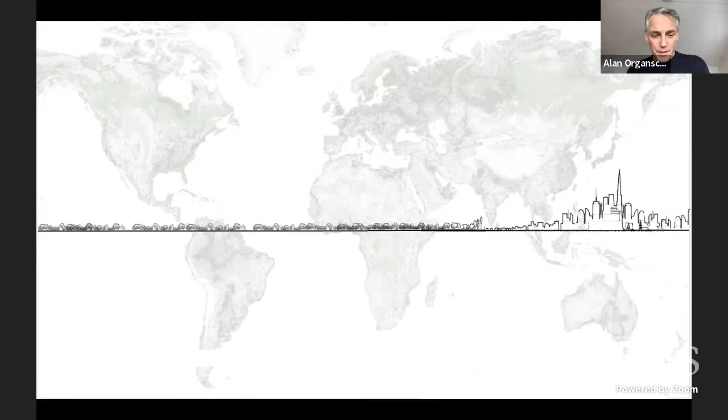And so really these two landscapes have been at war, or I should say one landscape, the city, has been a kind of predator of the other landscape, which is the forest. And if we look at the history of these buildings and we start to understand what it takes to build buildings of massive scale, we essentially have dug, literally and figuratively, ourselves into a giant hole.

And then if you also start to look at that giant massive pile of material that is represented by most global cities, we see that we have just surpassed the point where anthropogenic mass, in other words, buildings, the stuff that we industrially produce, now outweighs all the biomass on Earth.

And the first place we can deal with it is in our own work and right at the beginning of the building life cycle. And this is a thing that I really feel pretty strongly about, and that is that architects and engineers and builders have enormous agency as consumers of enormous amounts of material through the buildings we specify to act against these changing climate conditions.

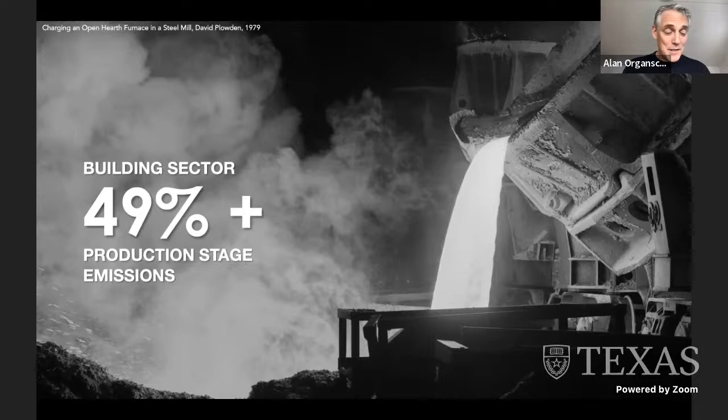And remember that first year is where we dump a lot of emissions into the air, and we create a lot of waste too, solid waste that's covering the Earth. So this is a little bit of a paradigm shift from the way we think about sustainability.

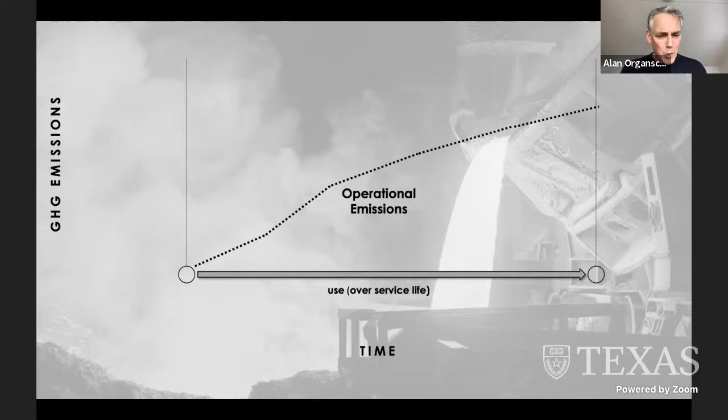We used to think about sustainability primarily as operational emission efficiency or operational efficiency, reducing energy consumption, building really fat, super insulated, super tight walls with lots of really good insulation materials that are made of fiberglass and foam, plastics, and things like that. And that was all very well and good, except what we found really over now several decades of pushing sustainability efforts, that we haven't solved anything.

And largely that's because in the building sector, what happens is we create this carbon spike, as I mentioned, at the building life cycle, and then our emissions are relatively flat if we have super efficient buildings or net zero buildings, relatively flat during the operational lifespan of the building. And occasionally we have some renovations and repairs, and that pushes a little more carbon dioxide and its equivalents into the atmosphere. Then it flattens again.

And at the end of the building life, we tear the building down, and mostly we landfill it. Sometimes we burn it for energy, parts of it. And that creates another spike. And so what you see is that we never, no matter how efficient we are in our building operations and how much insulation we pack in and how much renewable energy we use, we're always throwing more material and consuming more raw material to make our buildings operate better.

So we looked at this idea of comparative emissions around primary structural materials. And what we found was that concrete, timber, and steel have very different carbon footprints, of course, as you might guess, or you well know.

The problem is that when materials are typically compared, the metric is unit weight per carbon emissions. So that means a piece of concrete and a piece of wood by tonnage emit pretty close to the same amount, as you can see in that bar graph.

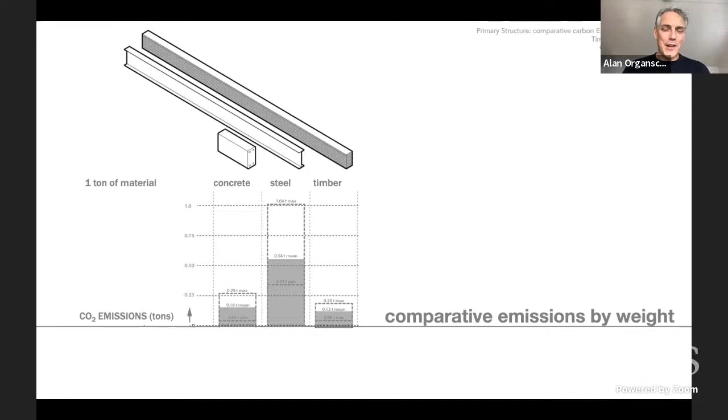If you take into account the massive increase in strength-to-weight ratio of a material like timber, you start to see that comparing emissions by weight alone is a ridiculous metric.

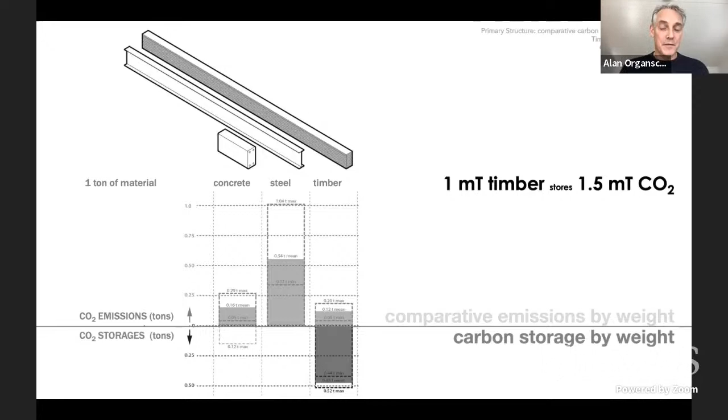And then if you add the capacity of these materials to actually store carbon, because biologically timber is half carbon, you start to see the real benefits of using plant-based materials. These are significant if you think about that big carbon spike we're talking about.

It is very ironic to me that a relatively low-intensive method of removing material and processing it produces perhaps the most destructive morphology we know in terms of building and urban human settlement, which is suburbia, with huge infrastructural costs, constantly updating roadways and transmission lines, and producing enormous vehicular traffic and associated emissions.

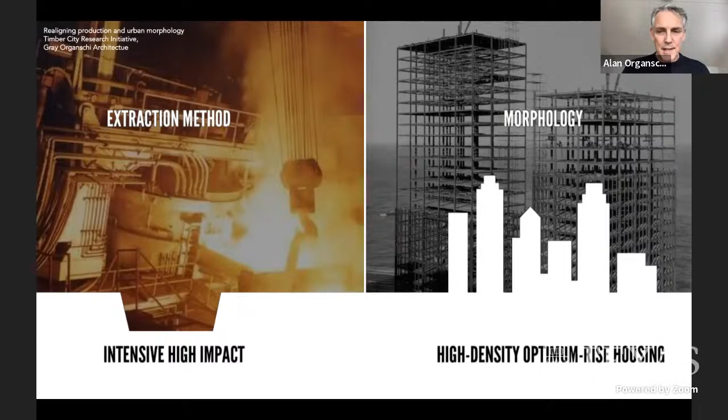Meanwhile, these really intensive, high-impact material classes, steel and concrete, which use enormous amounts of energy even when efficient, produce actually quite efficient building morphology—dense, high-rise or mid-rise building.

So the question is, how do you break the relationship that exists between dense urban building, which really should be our future given the population growth and land area available to us, and these more extractive mineral-based economies?

And then that same relationship that seems fundamental to the way we think of building, which is that timber is used for these very low structurally requiring morphologies, suburbia. We think we address it by really pulling in our skirts a little bit and looking very carefully at the way regeneratively or sustainably managed forests and other agricultural waste systems work.

Et cetera, can be moved through this new material processing that we're going to talk a bit more about today into the city.

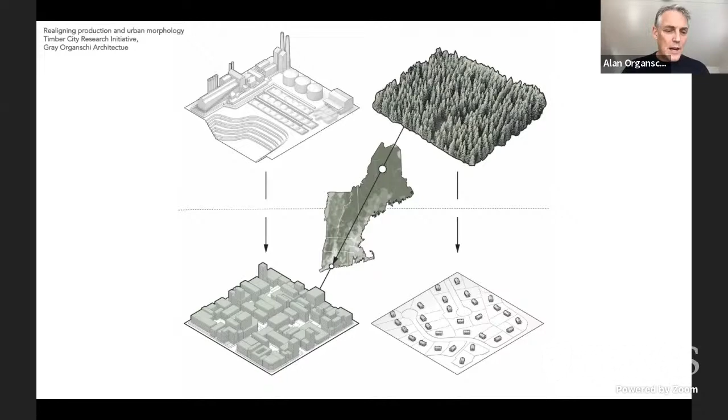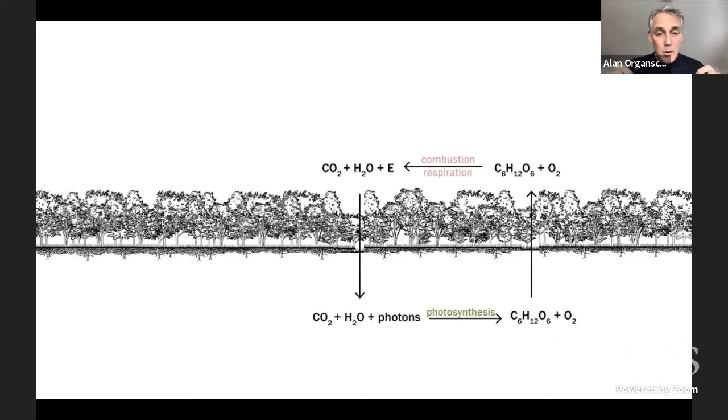What's really important to remember about using biological materials renewably is that the carbon cycle relies not only on forests, but also on the woody matter and soils that exist below in the upper layers of the lithosphere, where 50% of the carbon in our forest biome exists in the soils.

So you can literally cut down some trees, if you do it carefully, with potentially really good benefits, and still protect huge masses of carbon. And as the forest regrows, you get huge benefits.

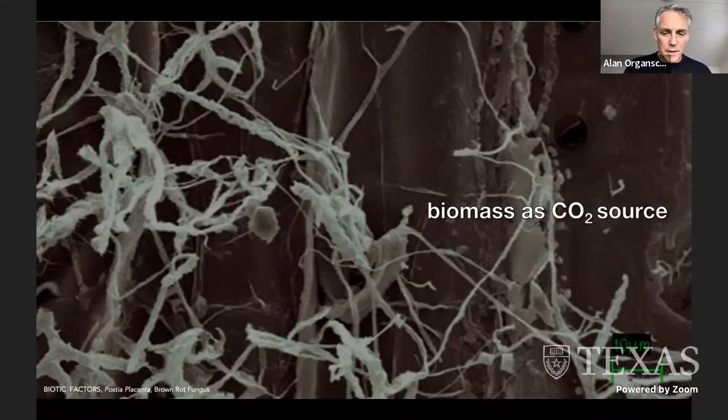So we should talk quickly about the challenges we face in thinking about using all this biological material for building cities. Biomass is, as you know, a CO2 source. As it rots because of a particular fungus, like brown rot fungus, it emits carbon on the forest floor.

Currently, domestic heating and cooking is fueled mostly in the world by wood, the burning of wood.

But there are other forces of forest conversion. Beef grazing land—land formerly rainforest converted to beef grazing land, say in Latin America, South America—is one source of forest conversion, as are agricultural conversions, like this oil palm plantation in Borneo, and tar sands oil extraction in Alberta, Canada. And, of course, suburbanization itself is consuming forest and creating emissions.

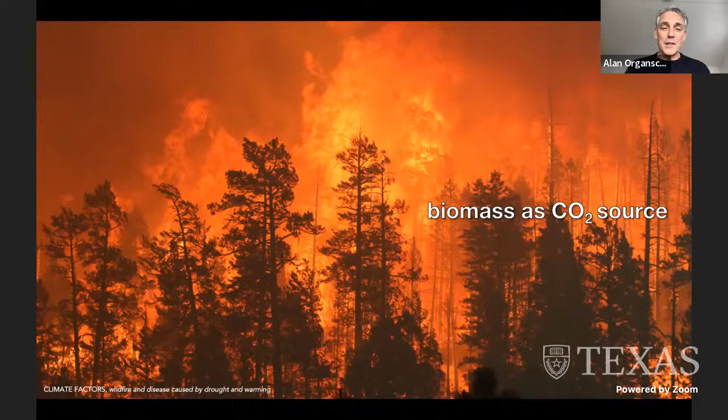And then climate change itself has a huge impact on forests, as we've seen in these catastrophic fires around the world.

So that brought me and my colleagues at the Timber City Research Initiative—Andy Ruff, who Michelle Addington knows well, Andy and I and a bunch of people from Yale—to start working on this idea that you could study forest growth and the systems of forest growth, this succession of different classes of forest, the different kinds of materials that come out of that, the biodiversity created as you create these different forest stands, as you harvest regeneratively, looking at how you transfer that carbon through these different products into buildings, whether moderate-size, low-rise buildings or larger, denser buildings.

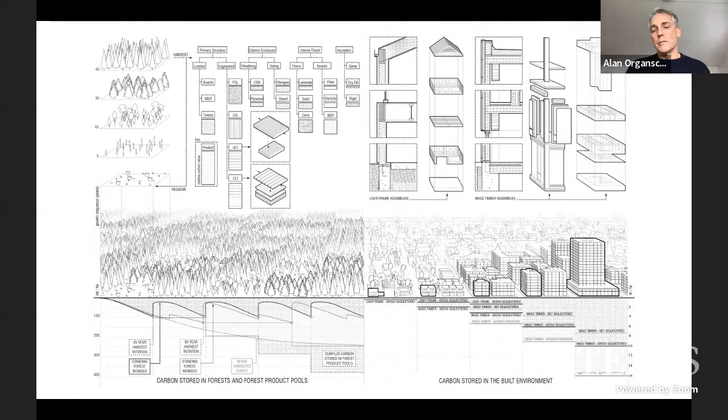And you start to see in that line underneath the horizon line this really important point: that forests will continually, cyclically absorb and emit carbon dioxide.

But if you can somehow salvage that material from the forest and use it productively, storing it in our most durable consumer products—buildings, especially big buildings—and now we have the technology and the building regulations that allow us to do that, you can store huge quantities of carbon.

And in fact, it has been studied by a colleague of mine that a standing area of Amazonian rainforest has less carbon stored in it than an urban district of the same dimension made of timber.

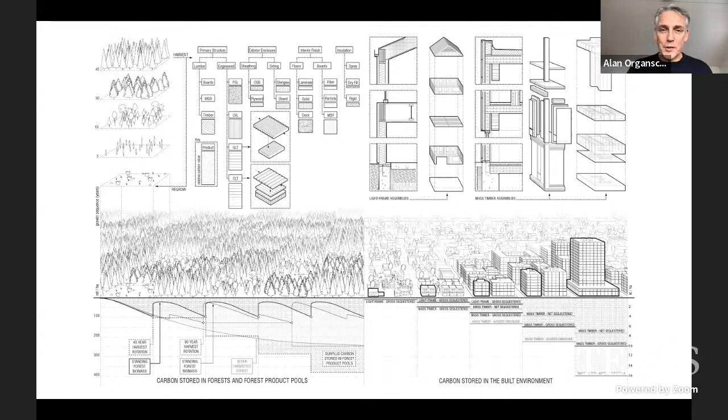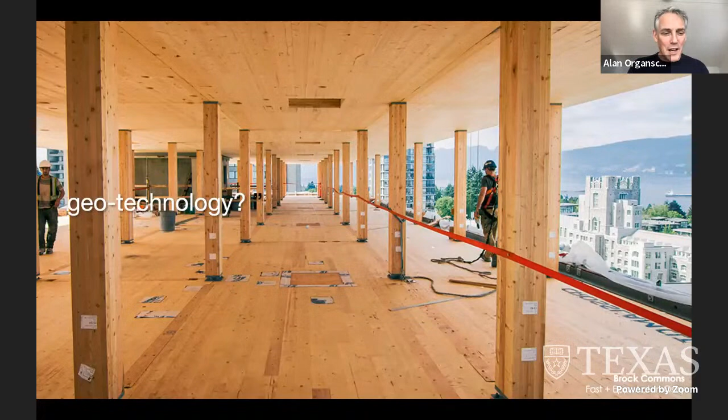So that's not to say we should be cutting down Amazonian rainforests, but that's just to let you know the capacity of the work we're going to do anyway to build for 2.3 billion people could be a force for regenerative work and a force of climate reversal. So the idea is that forests, obviously not a technological system, can work through their biospheric activities with

our technospheric activities as builders to produce a kind of synergy, a geotechnological one. So that brings me to this guy, John Schellnhuber, a theoretical physicist who ran the Potsdam Institute for Climate Impact Research for 30 years. He's a self-described amateur who loves architecture, and he ended up on a team with me writing a paper called Buildings as a Global Carbon Sink, with a Russian environmental scientist, a number of industrial ecologists, and political scientists.

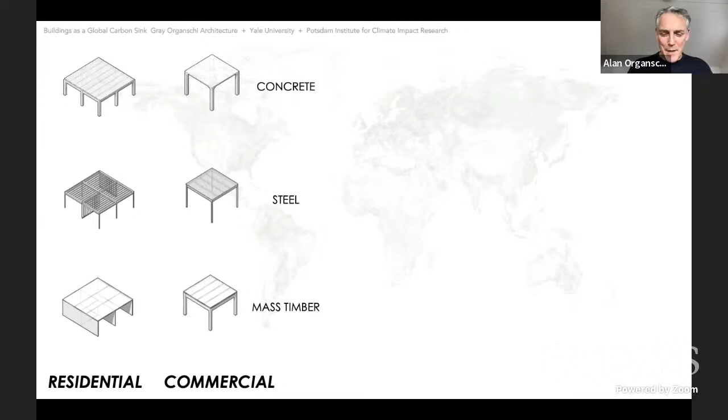We looked at the capacity of the built environment to reverse its impacts to the point that it's actually a beneficial carbon sink working in synergy with forests. I'll go through this quickly, but essentially our team modeled different assemblies out of different materials. We designed and engineered them for a generic average apartment unit, built into aggregated buildings of seven stories across the planet's demand. We were pretty quickly able to measure through this quantitative arithmetic process how much greenhouse gas would be emitted by these different material classes and building typologies, and how much would be stored.

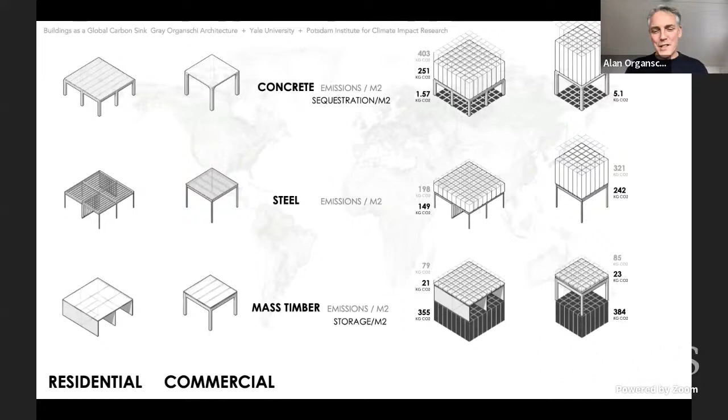But we were very careful to acknowledge that population growth will be happening in very different places, maybe remote from forests. So we looked at a 10% scenario, which is how much of the anticipated population growth is going to take place in Europe, North America, Japan, and Oceania, where there are already burgeoning mass timber or biological structural material programs at work, industrial processes.

Then we looked at a 50% scenario, adding in Asia primarily and South America, which covers about 50% of anticipated population growth. And then we went to Africa, where another 40% of the next 30 years of demographic transformation is going to take place. And of course, there are very vulnerable forest biomes that exist in Africa as well.

But what we found is that if we keep building the way we will, as I mentioned before, we're going to emit a lot of carbon. But if we could shift away from that capacity of material production and consumption and shift it into biological systems, we'll have a huge political economic shift globally, but we would also potentially store and avoid emissions equaling almost 36 gigatons.

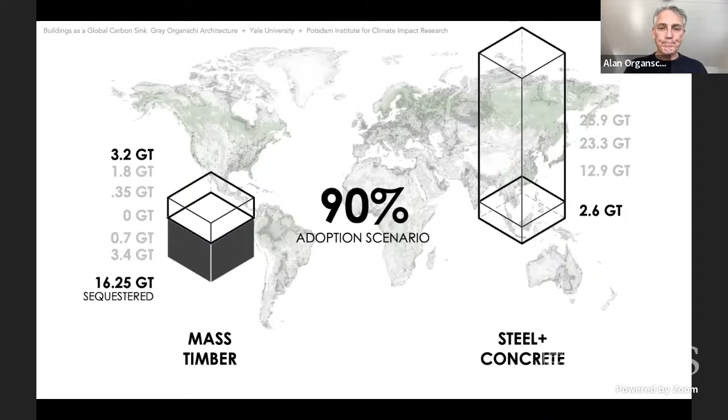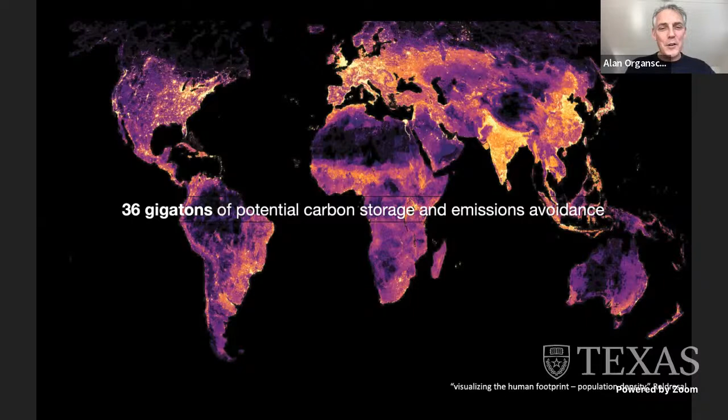So here we are globally, 36 gigatons of potential carbon storage and emissions avoided. This is the human footprint on the Earth, which we can use to store 36 gigatons of carbon that would otherwise be emitted to the atmosphere if we use this biomass scenario. That's a lot of carbon, but what's really important is that if we can do it right, this incentivizes 255 gigatons of potential carbon storage through afforestation or forest restoration and expansion that can happen across the globe.

And I'm not saying this is what you get if you all agree to sign on to the bioeconomy — we're really just speaking about potential here, and this is a way to maybe shift how we work and think in building. Just a note, these are not existing forests. These are forests that could exist were we to afforest landscapes that are readily able to be forested. So this is a long shot, but we have a lot to make up for.

I'll take a few minutes to whip through some slides, because I've been talking about these big picture items, and as Uli mentioned, I have an architectural practice. I actually started as a cabinet maker and had middle class guilt, so I decided to go to graduate school — some of you may have experienced that yourself. Anyway, I went to graduate school, incurring huge debt, and then went into business. Our practice was always geared to making things, particularly out of wood, because that was my training originally.

And then how wood can be manipulated and how it plays out in occupied spaces, and how those wood systems relate to the land around it, and more distally to landscapes from which we procure these wood products, and how far things have to move and how much energy is consumed in making the products that we apply to our buildings. And we got really interested in this question of industry, and we started looking at the way industry makes things.

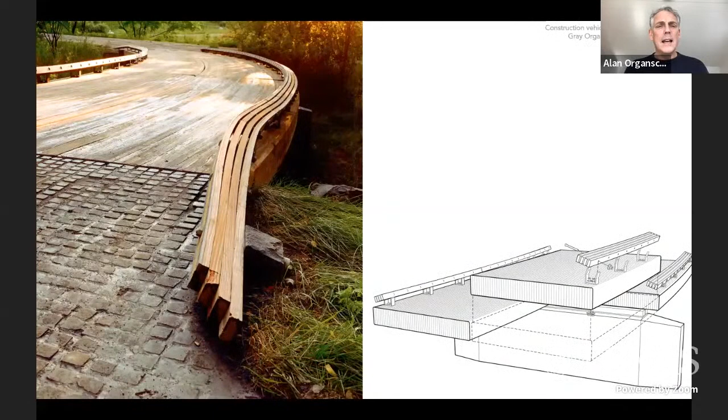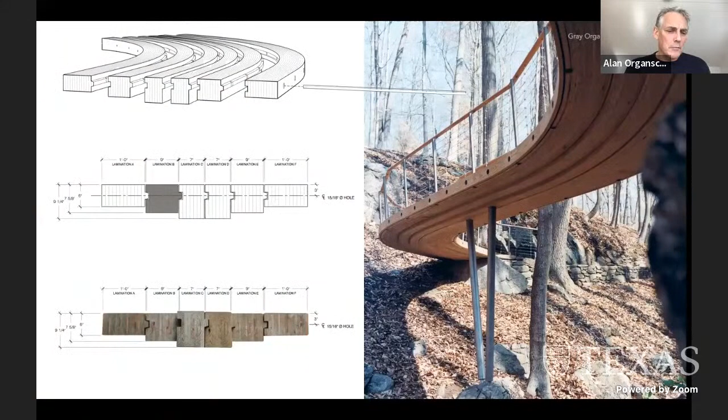So in the case of these series of bridges that I'll show, we went to timber glue laminators, and we started to look at what their processes were, which are fairly obvious, and what their maximum potential was, and how to essentially move material from industry by teasing out these tight configurations of production to make architecture out of it. Really simple architecture, but architecture that was really trying to assess industrial process, because that was really how we thought of our own work initially when we were working on cabinets.

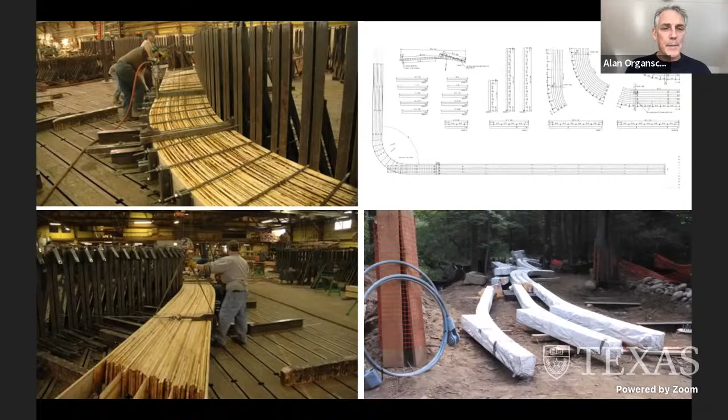But now we were bringing it up to the architectural scale. And of course, this is really interesting because these are essentially the remaking of beams of trees into new forms using, right now, adhesives, but a whole host of other kinds of mechanical lamination techniques, and then applying them out in the landscape.

And in our case, mostly these kinds of remote forest landscapes where we were building things like suspension bridges in remote valleys, and trying to figure out exactly how to move the material there and make sure that they were stable, and all the other problems that we run into as we try to build out in the world. As Frank Lloyd Wright once said, put our buildings out in the rain.

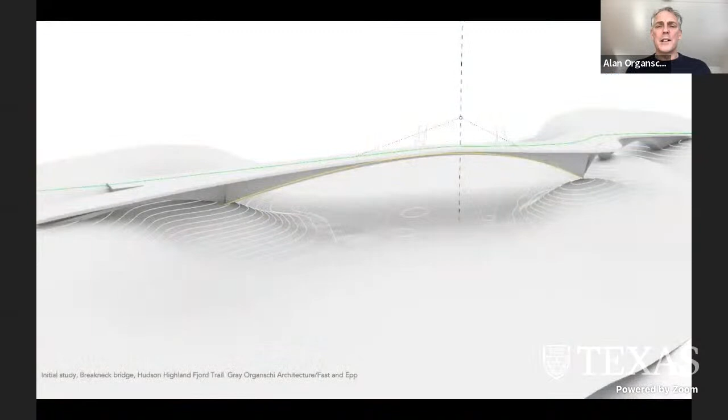And that has developed now into a more recent series of projects that are now sort of infrastructural scale, not just sort of pedestrian or small vehicular bridges. We're working with Fast and Epp in British Columbia, Vancouver, to make a bridge along the Hudson River to cross a Metro North railway track as part of a 9-mile trail that's being designed by Scape landscape architects.

And the bridge is a combination of glulam planks over a steel hull, that's a sort of ship-shaped arch, a series of arches. And this was a dogfight to get all the different agencies that have jurisdiction over this particular site along the Hudson River to agree to using timber.

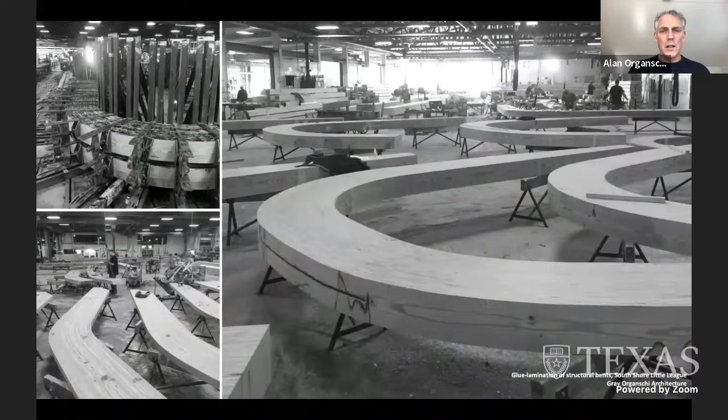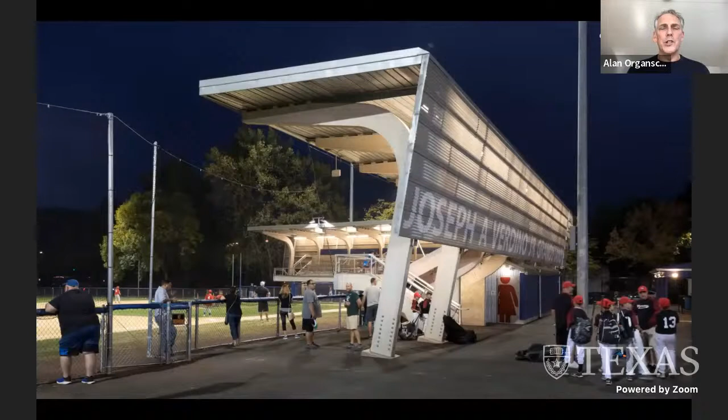And that's been really the story of our work all along, convincing the city of New York to allow us to use timber to build a small grandstand for a regional championship Little League field in Staten Island, where we were told that we should use steel because it's a coastal environment and steel's safer than wood, which struck me as kind of idiotic. But you can't say that to the head of the Design Excellence Commission at the New York City Department of Buildings.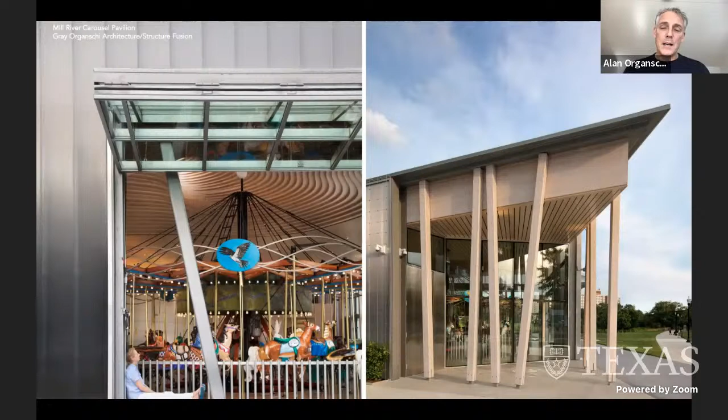And we also started to bring these kinds of wood projects, or mass timber projects, into small cities in our area. This is a carousel pavilion and event space in Stamford, Connecticut, just a one-story kind of shed. But we used really cutting-edge digital techniques, modeling techniques, and programming to produce this 40-foot cupola with 3 skylights in it right over the carousel.

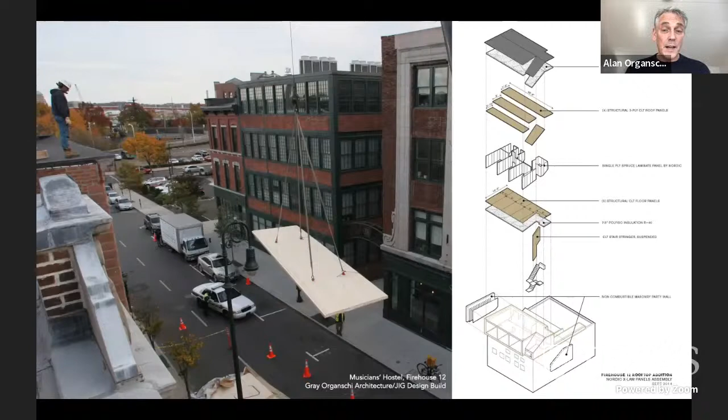And then also to bring timber into our city. The way we argued it was, we're in New Haven, which is a 19th century industrial city, and there are a lot of relatively low-rise 3-4 story unreinforced masonry buildings. And what we were able to say is we can create more density in your land-starved city by adding stories to existing historic structures without destroying those structures.

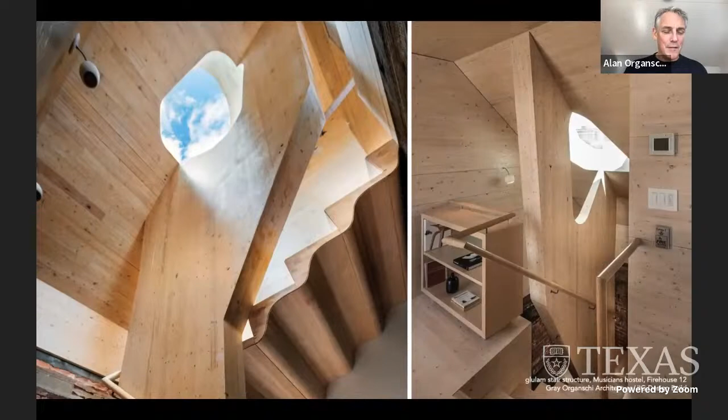And we're going to use these massive, very stiff but light systems. And we found that actually now in our third project, by adding these materials to the tops of buildings, we actually use these stiff structures to reinforce unreinforced masonry buildings. So there's this kind of synergy between this historic structure and fabric and these new systems, which we're using to create very simple housing.

And then we've also worked on schools. This is a school we did about 6 years ago, Common Ground High School, one of the first schools to use cross-laminated timber and these massive timber systems to produce the spaces that the students would live in, work in, spend most of their life in during their high school years.

And it was assembled incredibly quickly, prefabricated entirely, fully insulated wall panels over a structural mass timber frame, and assembled in 5 weeks by 4 carpenters on a small mobile crane. A fairly complex form, because I'm an architect and I like shape making too, like everybody else.

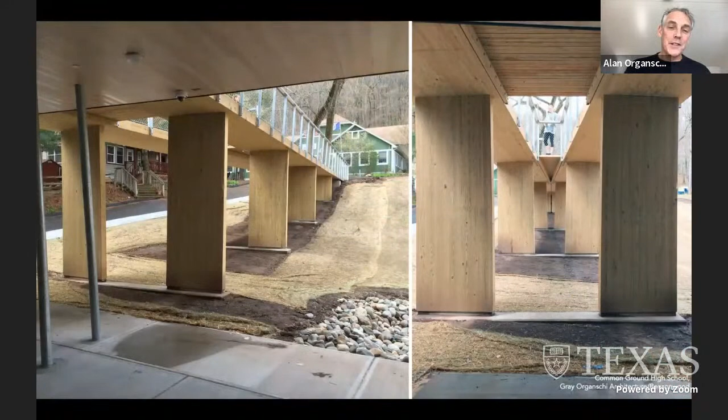So the building is essentially a suite of these different mass timber products, left as an industrial finish in the primary spaces and classrooms. The students seem to like it a lot, and they tell us the building smells good, which I think is a great new architectural criterion.

I tell everybody that, you've probably heard it before if you've ever heard me talk about it. What the students know also is the provenance of this material. They know what forests in Quebec this black spruce is harvested from.

But they can't tell you where the gypsum in the wall panels, covered in gypsum board for fire resistance reasons, was mined. And I think that's a big question we have to ask ourselves as well: how remote are we from the processes that we engage and incur?

What are the consequences of those processes that we're incurring when we build buildings, eat food, or drive a car? Unfortunately, advanced capitalism has allowed us to be ignorant of that. So part of the process I'd like to talk about is re-entangling ourselves with natural systems and natural landscapes, and doing it in a really productive way.

So the Common Ground School has led to a lot of other projects. We're currently making a 70-unit housing project in New Haven, Connecticut for a historically Black community, in a very housing deprived area of our city, built entirely not only out of mass timber, but fully biological, bio-based insulations.

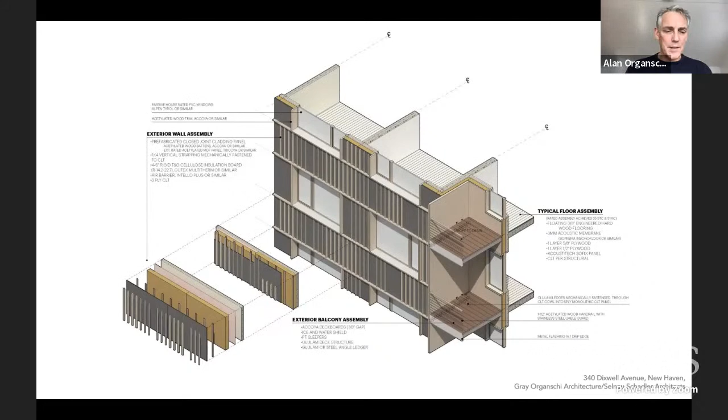Bio-based modified wood for the cladding. All the demising walls are cross-laminated timber. The base structure at the ground level, the commercial spaces and community spaces, are also made out of glulam, not concrete. So we really worked hard on this project.

It has gotten its low-income tax credit. It will break ground, despite the fact that we saw a tripling of wood prices between the time we first bid it for our low-income tax credit application and the time we were granted it. We've still got it happening. So there are a lot of forces at work.

This has brought me a bit to some more work on Timber City, and this question we're working on for the U.S. Forest Service right now: how do you actually bring wood production systems that are so geared to creating suburban morphologies and low-rise buildings into cities like New Haven, New York, Boston, Austin?

We've seen experiments in the Pacific Northwest and increasingly in the Southeast, but the Northeastern wood basket is huge, and we're not using timber in these ways, except in these small, more experimental projects that I've talked about.

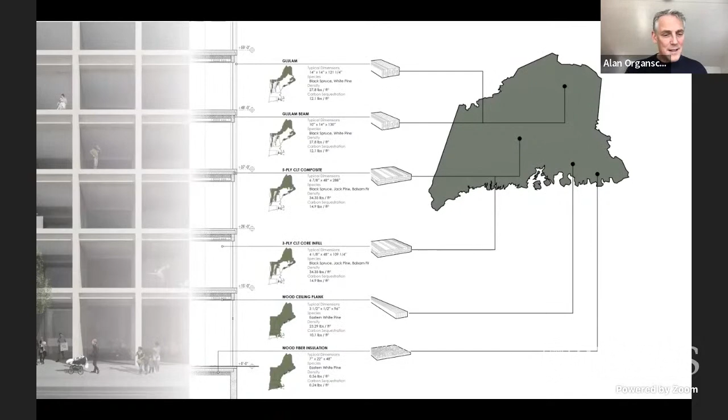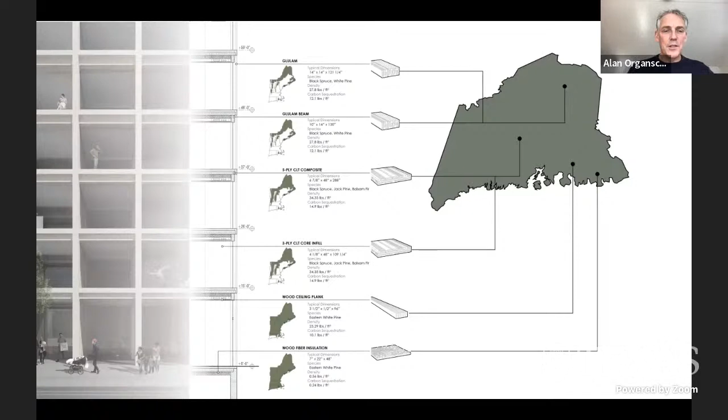So we're looking at how to take species that are coming out of forests, not cut from plantation forests or single-species monocultural forests, but rather really rich, diverse kinds of forests that exist in our region—mixed hardwoods, some different spruces and pines—and how we apply those throughout the building envelope and structure.

In the meantime, we looked at two landscapes, a working forest in Maine and a district in my city in New Haven, and studied very carefully how long it would take for these forests to grow, what the initiation of different stand conditions would entail, what kind of biodiversity existed within those different stand types, and how quickly it would take to regrow.

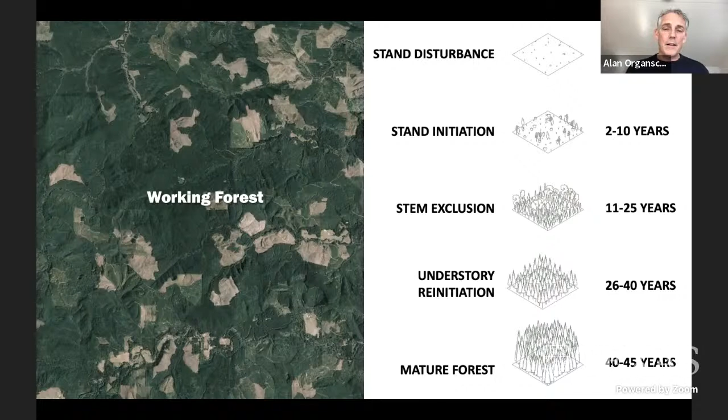Alongside, we modeled our urban forest, a series of prototypical buildings, 7 stories tall, with a number of units and cores and structure. We engineered them and measured how much carbon was in them.

Basically what we found was: we take 60 forest plots over 60 years, and use 45 of them rotationally for a mosaic harvest that brings a lot of wood into the city to build around 22 buildings in a 4-block area, which were former parking lots.

And we looked at the math: about 114,000 metric tons of carbon preserved in the forest because we didn't tear up the soils. We left 25% in reserve for existing wildlife habitat.

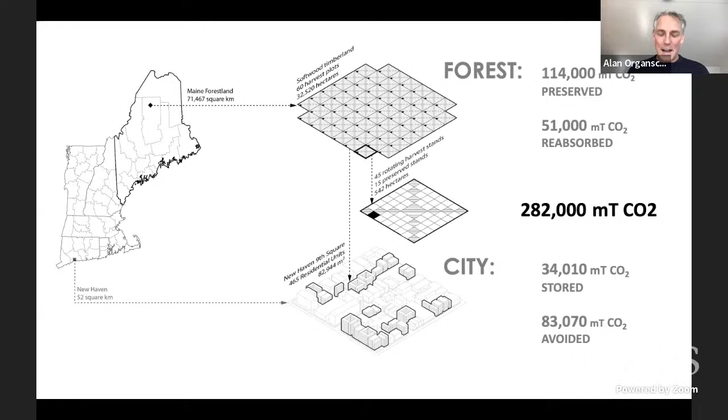Then we looked at how much was reabsorbed through the growth of the plots that we'd harvested, 51,000 metric tons. Then in the city, we stored 34,000 tons of that. So there's some losses. And then most importantly, what we didn't build out of steel and concrete avoided 83,000 metric tons of carbon dioxide. So that's roughly 280 thousand metric tons of carbon dioxide. That's a lot, sort of.

63,000 vehicles worth. We're pretty familiar with this metric. How many vehicles do you take off the road when you store carbon?

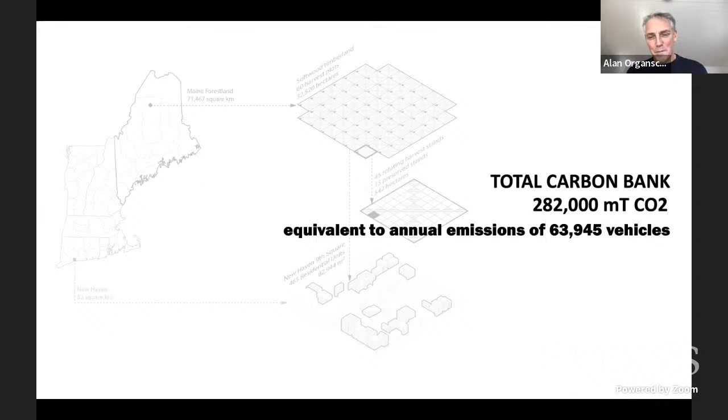From a standpoint of finance, $30 per metric ton is about what you get if you have to pay for polluting. You have to pay about $30 a metric ton to emit carbon dioxide in regional greenhouse gas initiatives, RGGI in the Northeast, Air Resources Board in California. And for those 22 buildings, that's worth $8.5 million, which, in the pocket of a developer, would be a nice chunk of change. A city authority with jurisdiction might like using that for supporting its tax base.

But if you look at the kinds of projections that are expected from environmental economists like Bill Nordhaus at Yale, over the next three decades that's going to quadruple in value, or cost, this waste material cost. And by 2100, it's expected that it could be up to $1,000 a ton, that will be the cost of emitting carbon dioxide. And so if we can put that back in the pockets of builders, we can help to support a new economy.

So I shifted up in scale again, but I do want to talk a little bit about teaching, because this has been a big part of my students and colleagues, like Uli, have helped me really think a lot about how we can introduce these techniques into a next generation of people who will be specifying buildings, designing buildings, engineering buildings, and actually building buildings, so that they can become experts in this new bio-building economy.

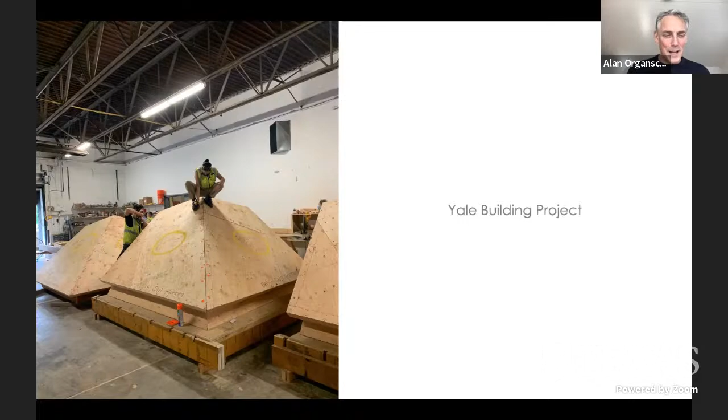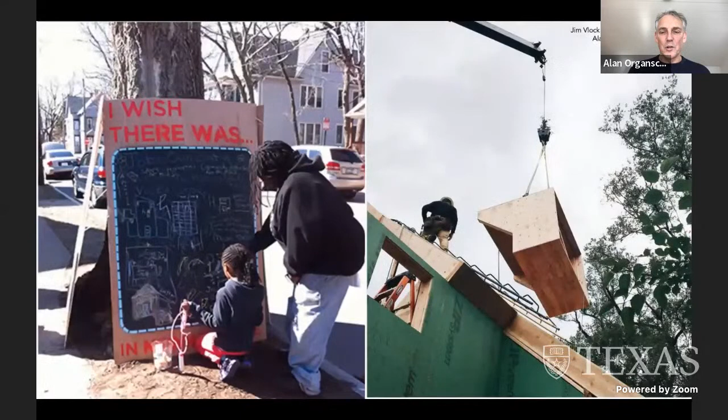I worked for a number of years running the Yale Building Project with colleague Adam Hopfner, a design build program that in recent years, working with Dean Deborah Berke, we were able to transform significantly by making housing for homeless families. Every year we build a house for a couple of homeless families who live in these duplex buildings. The students build pretty much everything except for the licensed trade requirements, electricity, plumbing.

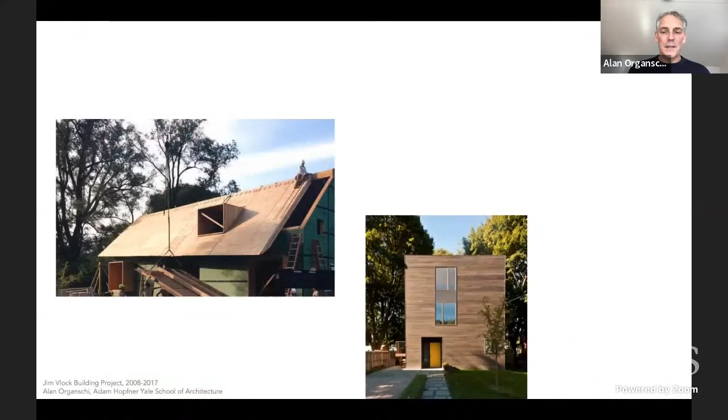A lot of this is prefabricated. And really we've been able to build quite a number of houses in inner city New Haven to meet the needs of families who are essentially disenfranchised from the housing market, business as usual housing market.

I think what the students learn is not only how to build and the experience of making their designs real, but they also deal with the real constraints that exist in a city like New Haven with strict regulatory requirements. And they also can use these building projects as a kind of platform for investigating any aspect of the building they want. So some of the students were doing life cycle assessments, studying carbon impact.

Some were studying material waste. Others were studying financing supportive housing in cities and in Connecticut. And other people were doing sociological surveys of how people felt in New Haven about the buildings that the students built. Some hated them and some loved them, as you might suspect.

But the most meaningful thing about it is that the students were actually seeing their work produce a home for families who've been utterly disenfranchised. And I think that's probably been one of the most rewarding things. I'm also proud of some of the buildings that were built. They're really beautiful architecturally.

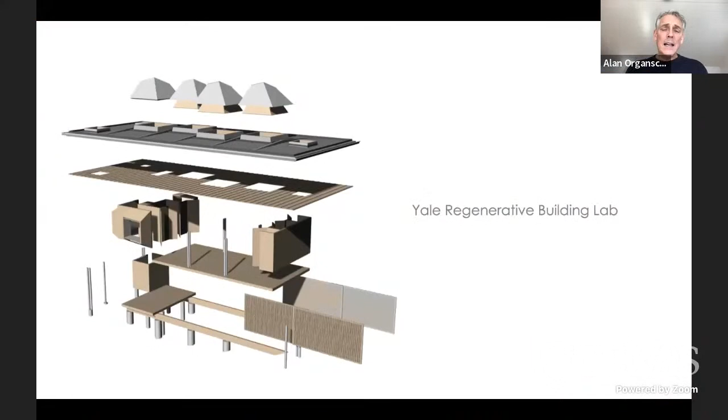About three years ago, I went to Deborah Berke, our dean, and I said, Deborah, I can't do this anymore. It's been amazing, but I've sort of reached my peak. And she asked me very kindly not to leave, which I was grateful for, but to start a lab, which we were calling the Yale Regenerative Building Lab.

Our first project was a joint project with the Yale Peabody Museum of Natural History and the Yale Institute for Biospheric Studies that needed a coastal research station on a remote island off the coast of Connecticut in Long Island Sound. This is a very undeveloped island in a rather suburban developed island chain.

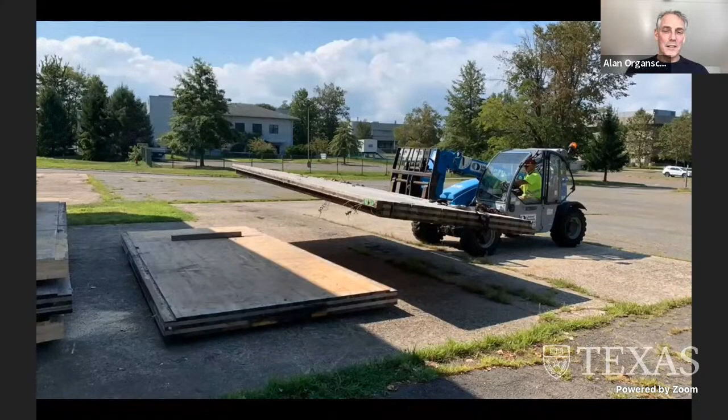We took our most advanced students, third-year graduate students in environmental science and also in architecture, and we essentially built a circular economic building, recovering CLT from the fire safety tests at Beltsville, Maryland, at the Alcohol, Tobacco, and Firearms safety lab.

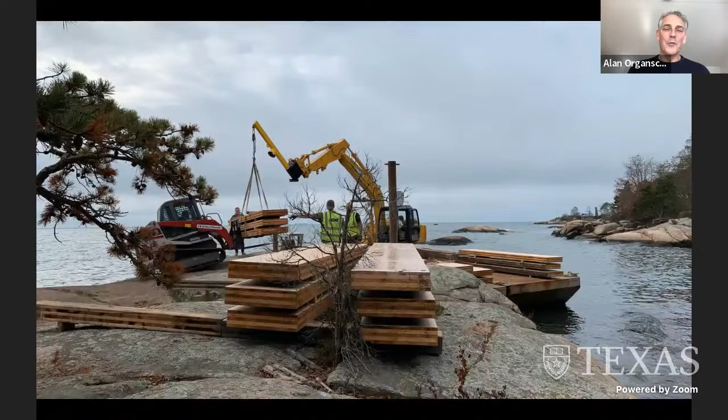We shipped them up to our workspace. We prefabricated the entire building, built the whole thing once inside the building and sections outside, then dismantled it for shipping, which we loaded onto a rocky outcrop. I'm driving that forklift, and I can tell you it's about the worst loading dock I've ever used in my life, but we did call it a loading dock, and we moved these panels and reassembled the building on site.

Part of that was going into the forests of Horse Island, the island on which we were working, and looking with foresters at these very degraded woodlands that these forests had become, thinking of ways not to take the best trees out of the forest, but actually the worst ones, and how to use them.

To create the structure of the building. It was a great exercise, because what we learned was no real lessons on how to solve the housing crisis for 2.3 billion urban dwellers, but we did learn some of the resources that exist close at hand that can be used if we think a little more imaginatively about how we're going to build in the future.

This is a particularly bespoke project, no question, but we were using hemlock cut from the Yale forests that were dying of a disease called woolly adelgid, so they were harvesting those. They had a bunch of hemlock, and we found different ways to use them for structure and finishes and things like that, to produce this sort of open pavilion with big sliding doors that close up for classroom use on an island that's only accessible by a 20-minute ferry ride.

That finally culminated for us in this project that Uli mentioned, which is the ecological living module, the ELM, that we built with the Center for Ecosystems in Architecture at Yale.

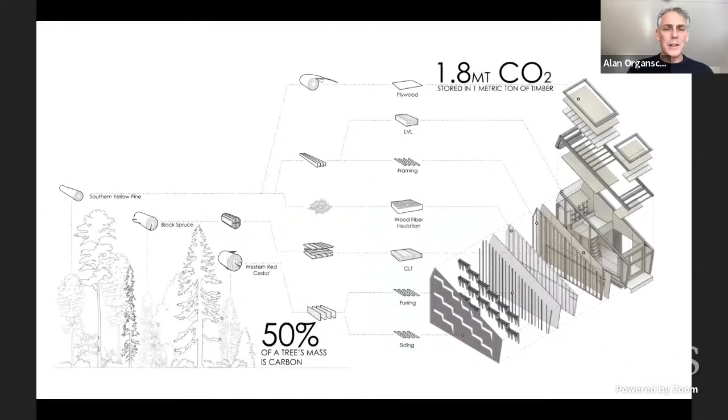Organschi, my firm, did all the design of the building and the prefabrication, and worked really closely with the engineers who were developing the environmental control systems, which sought to meet every one of the UN Habitat and UN Environment's sustainability goals — to consider exactly the sourcing of material, how much carbon could be stored and how much would be lost through emissions, and how to actually create a series of integrated systems operating synergistically.

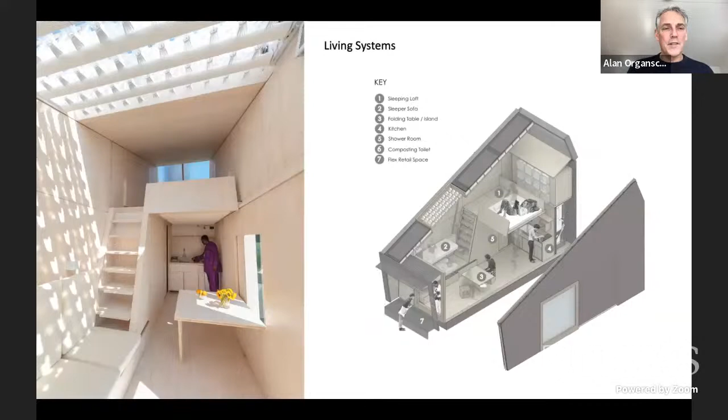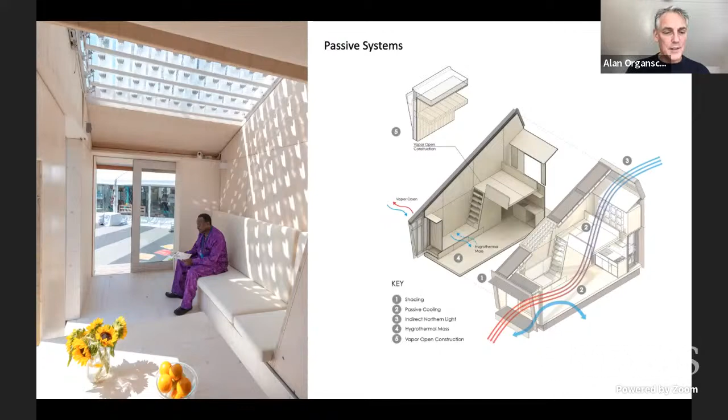Not only to grow plant materials on walls, which is actually not a terribly efficient system of agriculture, but mostly to create systems that would provide safe, secure housing for up to 4 people in a peri-urban site where there might be food, water, or physical insecurity, and how to create systems that would provide passive ventilation, water absorbed through condensation of water vapor in the air, potable water, and energy systems using very efficient solar PV skylights developed by the Center for Ecosystems in Architecture. The story goes on and on.

What we did was we had 8 weeks to build this thing, and we had 2 days to put it into the UN security perimeter at the UN Plaza in New York, which I can tell you is like imagine bringing a building through airport security every day. It was not fun, and they didn't like us until we finished it. Then everyone loved it, because one of the things we also know as architects is when you finally build the building and you do it pretty well, people really appreciate the lessons that building can teach.

I remain committed to this idea that we can change the world through our experimentation, as long as we scientifically substantiate our claims rather than just make claims. That's something I really wanted to work on.

The other thing I want to say about this last project is this idea that all of these people arrayed to make this little building were everybody that touched the design, the construction, the systems engineering, the logistics. Everybody here represents a huge group of people who are collaborating, and to remember that architecture is a highly collaborative undertaking.

Not only do we specify huge volumes of material, making us by far the largest consumers or agents of consumption of anyone in the world, but we also entail huge teams of workers on this thing, and we have also a way to make our experience of work and enterprise positive and healthy. That's the thing I want to bring — it's not just about carbon and biodiversity and energy savings.

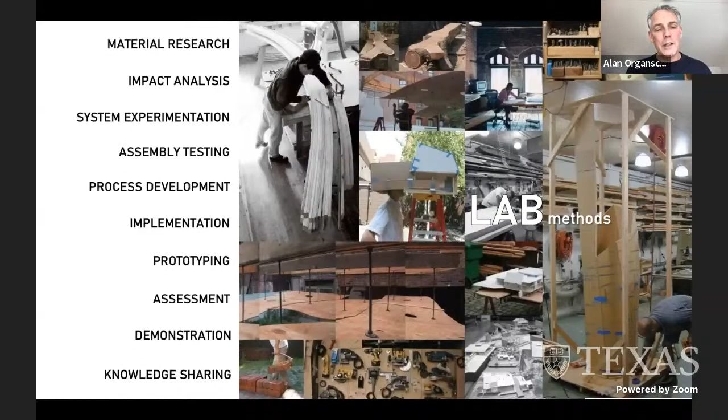So we're engaged in a whole host of different methods of touching material, processing it, trying to understand it, not eschewing big industrial processes, but also really trying to look closely at historic and traditional cultural practices. And our work is inevitably transscalar.

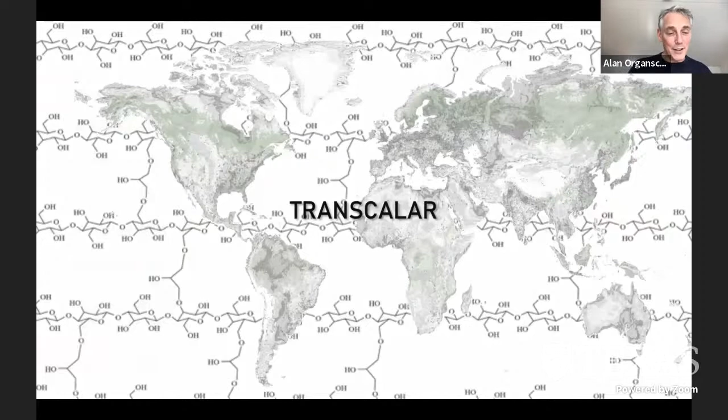We're looking, as my friend Kiel Moe would say, from the molecular to the territorial. We're trying to think across these spaces.

We must work globally. I am in the heart of Europe, in Berlin, but I will tell you that I am not that worried about Europe. It's the rest of the world which is seeking to grow and reach the standards of living that the more advanced economies have already reached, and may endanger us and themselves by replicating our poor behaviors.

It's very important. This collection of workers are working in a science-based design program. The idea that a new set of criteria in the old triad of materials, means, and methods would include impact, and that we have to understand those impacts.

And of course, it's interdisciplinary. We're climate physicists, urban systems modelers, artists and architects and engineers and manufacturers and financiers and policymakers. And it's an amazing consortium. We work collaboratively, amazingly, in the same room.

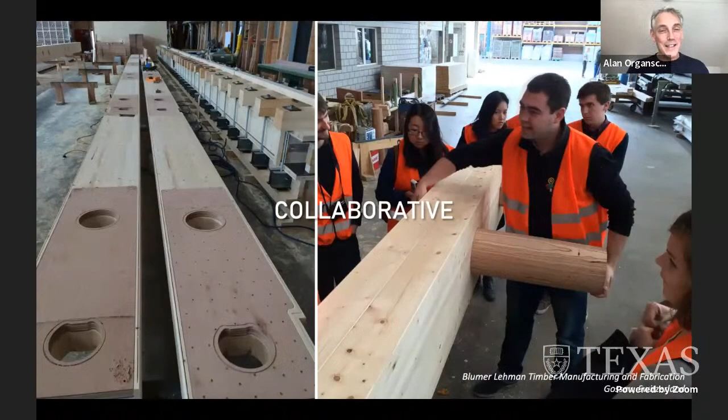We sit down all together and do this work, and sometimes in the factory. And we talk to people across the sector, mobility services, cancer research, and we're really learning a lot from their knowledge base as soon as we learn to speak each other's languages.

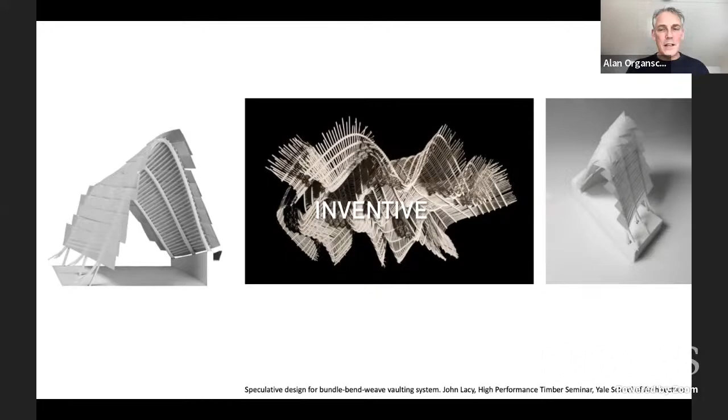And of course, I want this work to be inventive and beautiful and exciting, because I think it's very promising, but that tool of making cool forms is no longer serving us. In fact, it's creating incredible complexity and cost in terms of climate impacts.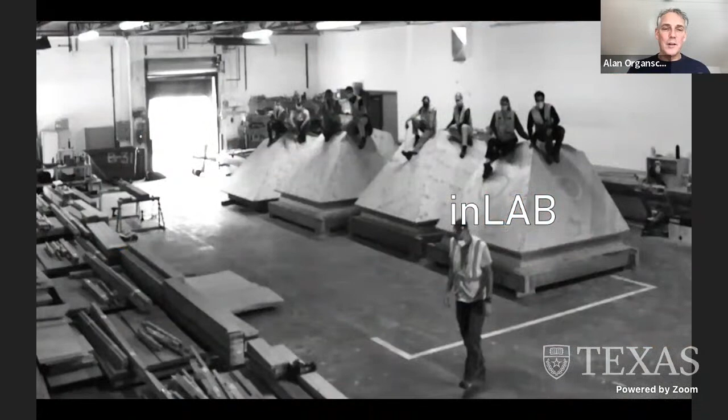And we want to be specific about our work, the work in these different places that we engage. So my lab is essentially in the process of developing relationships with lab partners around the world, so-called exLABs. Our inLAB in Berlin is in an old gas plant where we have a workshop, but we also convene meetings with all these different people.

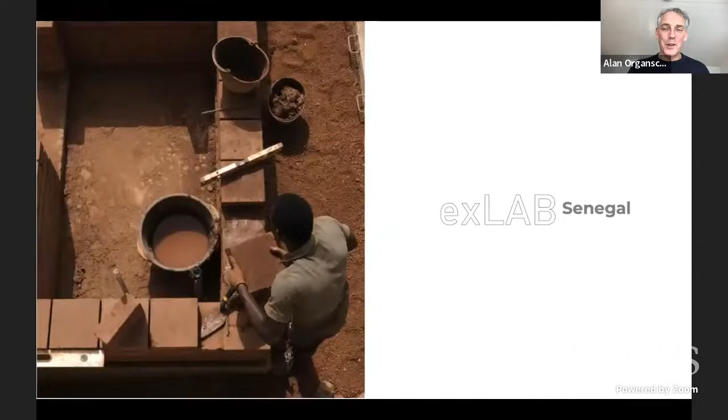And then we have exLABs, which are essentially a series of partnerships that are starting to grow. So in Senegal, we're working with people who are doing unreinforced, unfired brick to produce multi-story buildings, and we're developing a lab program there.

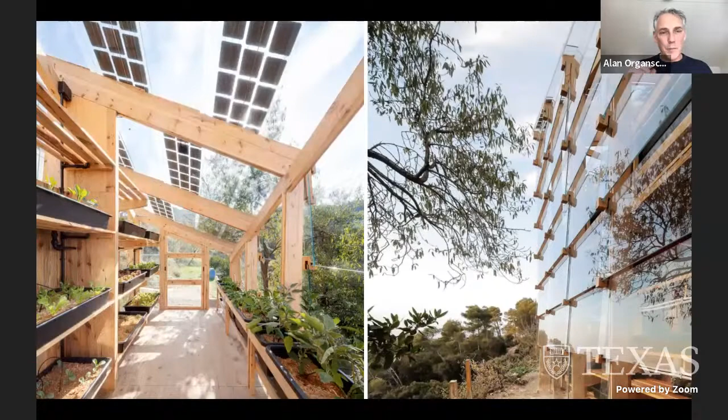We're in Indonesia looking at bamboo as a building material for mass bamboo multi-story buildings. But what it entails is the entire system of production, which includes land grants and reforms that allow small communes to harvest material, cut and process it, ship that material to shared cooperative factories, make the mass timber, and then send it out into the market.

And so the 1,000 Bamboo Villages program has signed on with us, and our colleagues, Arif and Rezal, are working with us to share information.

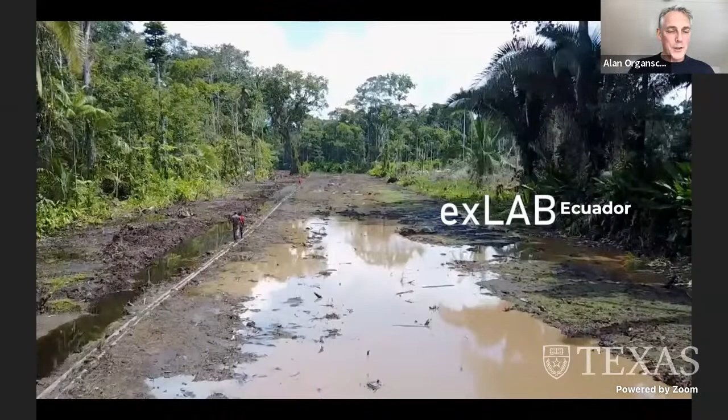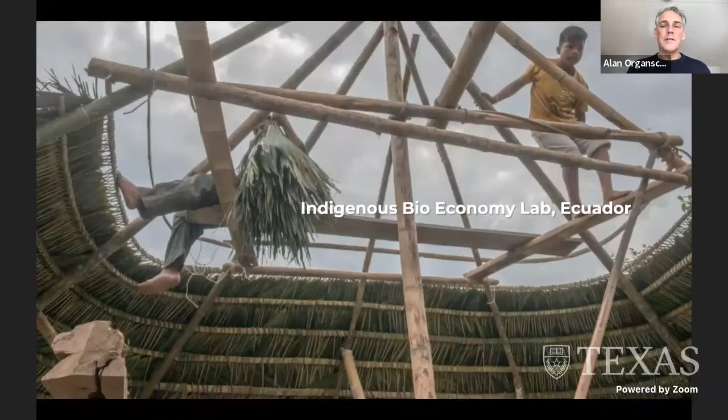And we have new programs that are developing around industrial corridors with Ana Maria Duran Calisto, who is running a restoration lab along the industrial corridors of the Ecuadorian Amazon, and trying to develop actually a bioeconomy, not just focused on building, but also the different materials that will can produce new kinds of products within a regenerative and sustainable forest management program and restoration program.

And our themes are what you'd expect: life cycle impact reduction, economic circular economy, regenerative restorative supply, carbon econometrics. How do you actually monetize carbon to make it incentive to build with it? How to substitute materials that are made biologically, because that's a real challenge that we face. And how do we use ecosystem services of forest landscapes rather than trying to replicate them with mechanical systems?

As I mentioned, there exists in the building supply chain not just hardship, but actually human slavery exists within the building. Some of the products that are manufactured may entail human slavery. So how do we switch that so that this revolution can restore societal benefit, socioeconomic access to resources?

And so we have our series of steps, and it starts with trying to stop climate change, but through that, build a system of kind of systemic benefit through the act of building, and to look at that across scales, from material units to landscapes.

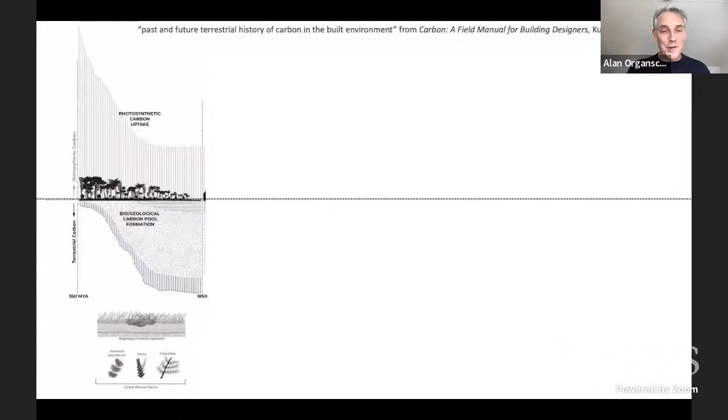And really what we're describing essentially is a kind of reversal of history. It's a really grand scheme, but 350 million years of slow absorption of carbon dioxide, atmospheric carbon dioxide, through plant growth, the deposition of that carbon into soils, and through compaction and high temperature, the production of fossil hydrocarbons. That 350 million years was essentially undone in 170, the Industrial Revolution, where all of that was dug up, and the fugitive carbon produced enormous challenges in our environment, which we're seeing manifested through a host of weather conditions and environmental impacts, sea level rise.

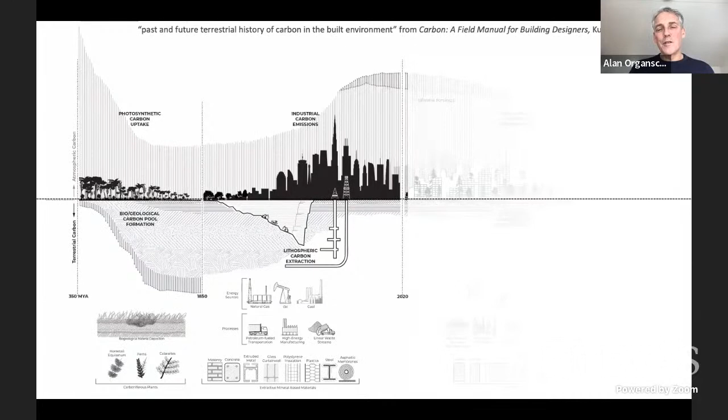So what would happen if in the future, from this day, if we could somehow move forward with drawing down the carbon impacts that we've created through the synergistic relationships that I mentioned before between natural forest growth and city building.

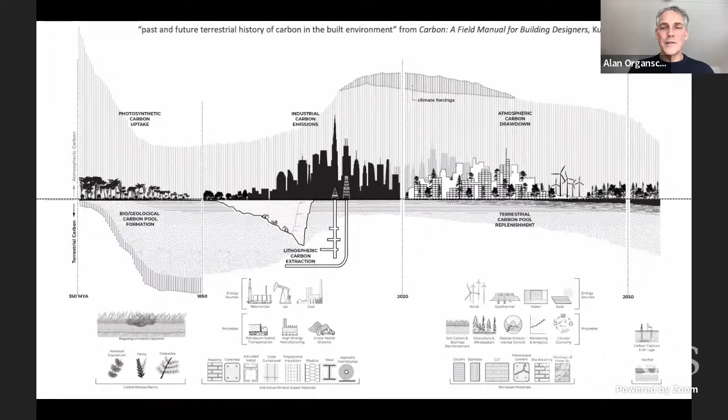So I'll close. This is a project that we did about 12, 13 years ago, a landscape of building material spread across a formerly productive forest, and to turn that into a kind of building and to use it as a way to make building form and finish.

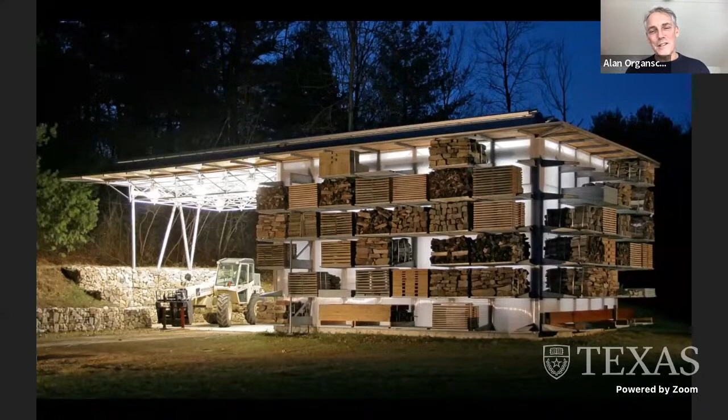It's really a metaphor. It's not a truly circular economic building. It's a storage building for materials. But in some senses, I think what we were trying to do was tell a little story about tidying up the mess that we'd made, and to try to make something strong out of that, rather than just have it be a task, a burden.

So I'll end there and just suggest that we have a kind of new manifesto in our hands, ready to think about how buildings not only can solve the housing crisis, but in the process create systemic benefit for all mankind, humankind, and hopefully do it really fast. Thank you.

Thank you, Alan, for this really wonderful talk. I've obviously seen some of your work before, but it's always refreshing to see how you package things, and also the new things that you've done that I've just learned about. I really appreciate the breadth of the work that you've engaged in over the years of your career.

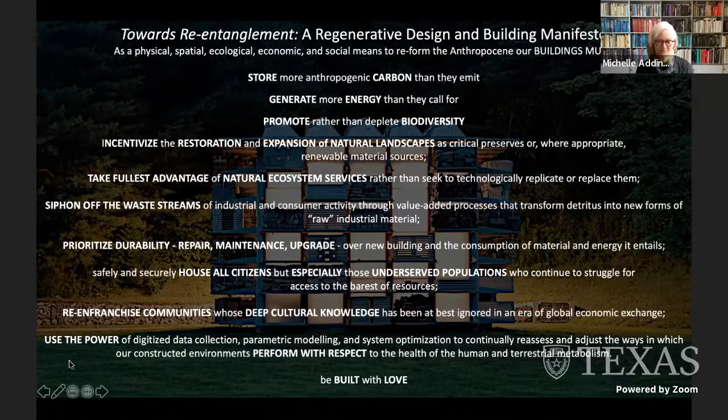David, you had your hand up.

Yeah, Alan, first of all, I just have a very quick question. I just wanted to thank you because I'm getting emails flooding into my inbox—great talk, great talk, great talk, great talk. So I just wanted to say thanks. My question is just a permission question. I'd like to share this lecture, the tape of it, with students from the engineering school, with some faculty there. I just wanted your permission to do that, because this is just a great talk—super broad, super spectacular.

I have my own interest—I'm going to write you because I'm doing some projects in Ecuador right now as well. Great, excellent, yeah, super interesting. We're up against this kind of cultural wall of concrete down there, and the kind of insistence on the use of concrete. But I just wanted to say thank you and ask your permission to share the lecture.

Yeah, by all means, and I can actually even share the slides. Let me just run through really quickly, David, and make sure I have all the attributions correct so I don't perpetrate intellectual property violations. We'll look the other way.